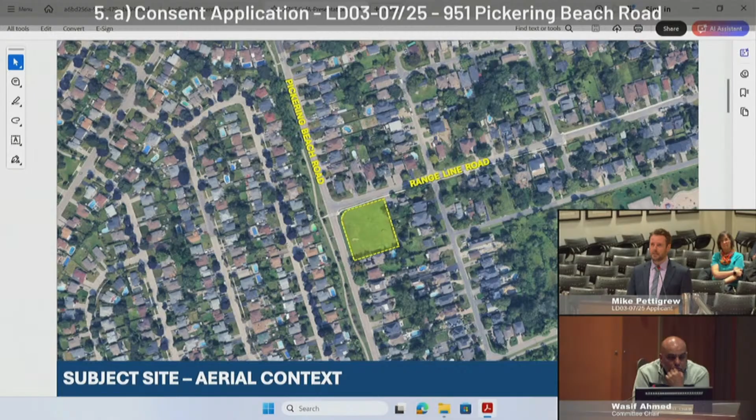So the previous approvals in 2021, those are the application numbers that were for the consents, and as I mentioned, those 5 lots are registered and they are in place. In 2022, we also submitted for minor variances for single detached homes on those properties, and those are the variances that were ultimately approved after an appeal to the OLT. The appeal was dismissed, and the ruling of the Committee of Adjustment was therefore upheld.

So the current permissions: on April 7th and then subsequently on April 22nd, the Planning Committee and Council heard and then approved a rezoning of the property to the R2B zone to allow for the semi-detached units. We submitted concurrently the application for the consents that follow and conform to the provisions of the R2B zone. So we are not seeking any variances to that zone. It is the standard zone that is going to be in place, and the lots before you today will actually positively exceed some of those provisions.

For instance, the semi-detached in the R2B allows for a 6-meter frontage. We're actually doing 7.62, which maintains the 15.24 standard from the single detached. We've just simply split those in half.

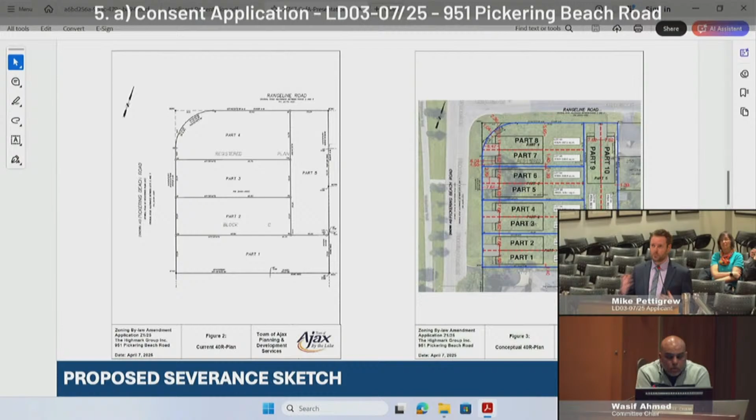On the right it also shows the footprints. You can see that there are still significant rear yards to these properties—they're quite deep—so we're maintaining the same general footprints as the singles.

Next slide, please. This might be a little harder to see, but I'm trying to show it in context—if you can zoom in, that's the same drawing you saw on the right, but now in context with the rest of the neighborhood. Again, this illustrates how those building footprints and the rear yards and setbacks around them are very similar to the single detached units and dwellings in the immediate surrounding.

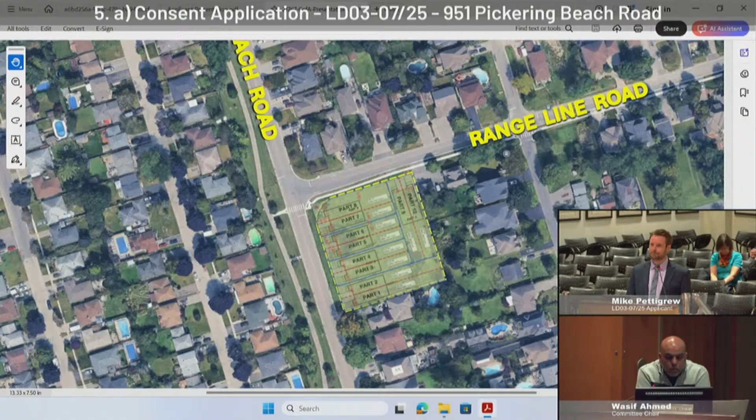Next slide, please. This is the same thing, but I've just put the building footprints there to illustrate: outside of those footprints, of course, are the driveways at the front, and you can see the amount of open space that'll be in the rear yards for each of those properties.

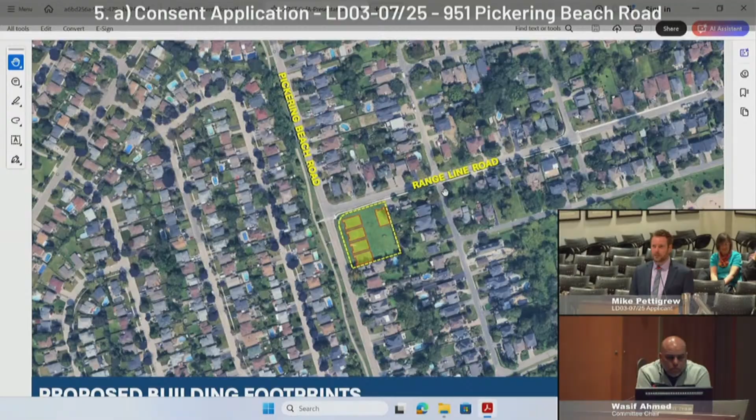Next slide, please. In terms of the policy context, which was also looked at through the zoning approval that went through Planning Committee and Council, the proposal—and we agree with staff's opinion—is consistent with the provincial planning statement. It does conform to the Region of Durham official plan as well as the Town of Ajax official plan, and as I mentioned at the beginning, it will conform with the R2B zone now in place based on Council's approval.

We are not seeking any additional variances. There will just be the variances that run with the property previously. In terms of the overall Planning Act criteria, these lots are consistent with what is in the area in terms of the 15-meter or 15.24 meter wide lots, but as 2 units rather than a single unit. It's maintaining the same driveway widths, not in excess, same amount of landscape and open space in terms of coverage, as well as the overall height and massing of the building, which in our opinion is consistent with the character of the neighborhood.

So therefore, in conclusion, we've reviewed the report, as we already mentioned at the beginning, and those conditions, and we are in support. Based on that, we recommend approval of the severance request subject to those conditions. Last slide is just any questions.

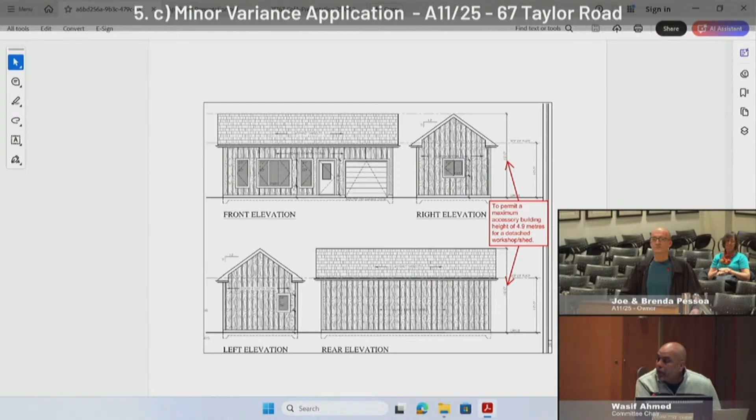All right, Joe, so that's been approved. It'll now be subject to the 20-day appeal period, like I mentioned at the beginning. But while you're doing that, you can still apply for any paperwork, building permits, that stuff. Just note that it will not be issued until the 20 days have lapsed.

Okay, that's fine. Yeah, thank you very much for the committee and the staff as well. Yeah, they're awesome. Smooth sailing. Thank you, Henry. Thanks. Thank you. Good luck.

All right, next on the agenda is item D, minor variance application A1225 for 701 Finley Avenue. This is to permit a minimum setback for the north interior side lot line of 1.8 meters and to permit a minimum one parking space per 224 square meters of gross floor area for a public storage facility.

Do we have an applicant or an agent here for this application? Yes, hi, good evening. Is that Heath? It is, yes. Good evening, sir. Can I just get you to introduce yourself a little bit and your relation to this application?

Sure. Good evening, Chair and committee members. My name's Heath Partell-Sharp. I'm a senior planner with Groundswell Urban Planners, and we're here on behalf of the owners of 701 Finley Avenue.

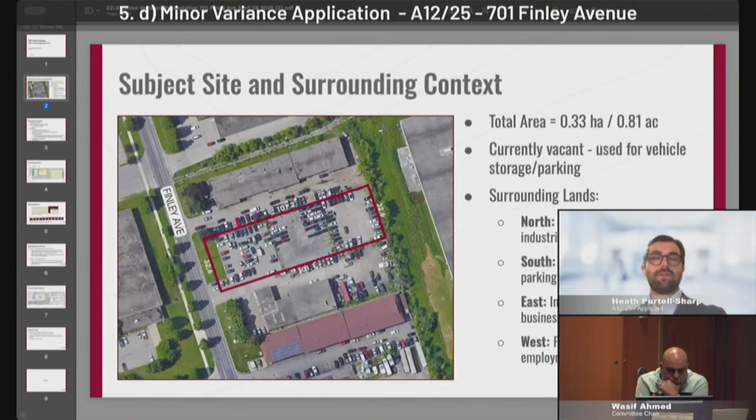The site is currently vacant of any buildings or structures, and it does have an existing curb cut access off of Finley Avenue on the left side of the screen there.

So the development proposal, we're currently working through a site plan application with the planning department, which proposes to develop the site for a small public storage facility. The development includes 3 storage buildings with a total of approximately 1,120 square meters of storage space.

Buildings B and C, on the east side of the site, are designed as individual units with roller doors more for drive-up access. The larger Building A on the west side is designed as smaller units with a common building entrance. We're proposing 5 parking spaces for this development, along with a large dedicated loading space as well.

In support of our site plan application, we submitted a traffic impact and parking study undertaken by our consultant, JD Engineering. It assessed storage facility parking precedents in the surrounding area in both Ajax and Pickering, conducted and obtained proxy data from those sites, and ultimately concluded that the proposed 5 parking spaces would satisfy the peak parking demand for this development.

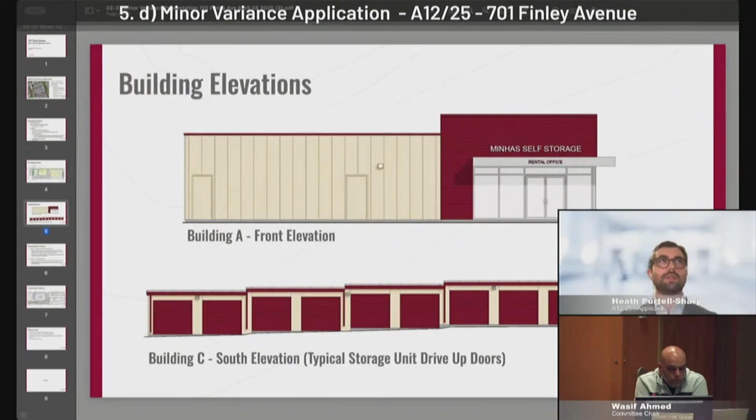The variances we're requesting are, specifically, from Section 5.10.2, which requires a parking rate of 1 space per 28 square meters of GFA for non-residential uses not specified a specific rate in the town zoning bylaw, as a public storage facility is not specified under this section. This is the standard required rate in the bylaw. So the variance we're seeking is to permit 1 space per 224 square meters for the public storage facility.

The second variance we're seeking is from Section 6.4.2, which requires a minimum setback of 3.5 meters from the interior side lot lines. Our variance seeks to permit a minimum setback of 1.8 meters from the interior side lot line, but this is limited to the north interior setback only.

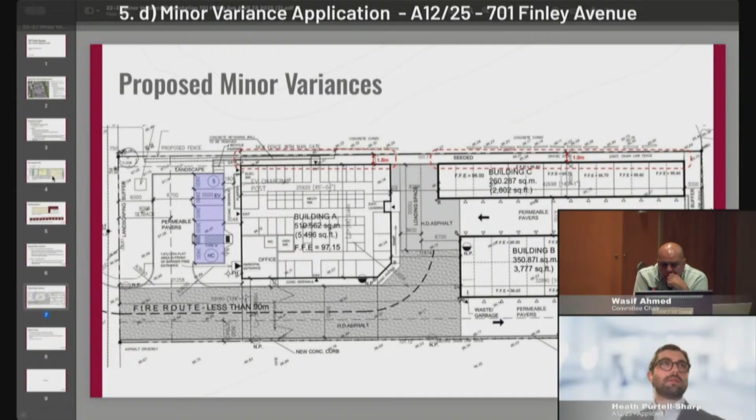Okay, so the 1.8 on the top right of that, highlighted in red - what's immediately to the south of that area? I see the units in the pictorial, but are those units the drive-up units, or will there be cars coming right up to that area, or is that from the inside only? Maybe on Building A specifically, can you better show it on this image with the color differences - is the concern on the east side of Building A or the west side, the left or the right? The top would be the north, correct? So it's those ones there - that's the one I'm questioning.

So I can see in the background of that yellow area, I can see the units - I believe those are storage units, correct? Are those the drive-up ones, or are the drive-up ones only in buildings B and C, and those ones there are actually inside a building, a covered building?

That is correct. Building A is a more traditional warehouse style building with walk-in access storage units, and buildings B and C are demarked with these small triangles where the vehicle drive-up roller doors are.

So the north interior side lot line relief you're seeking faces this property, and looking southwards I would just see a flat building, correct? Correct, yes. There's no windows or anything in that building structure that would be overlooking. Okay, thank you, I appreciate that.

All right, I'll then look to other committee members to see if they have any questions. Amanda?

Through the chair, will Building A be staffed? Will there be an employee in Building A? There may be an employee there from time to time to deal with rental arrangements, but I don't anticipate full-time staff on site. It's intended to operate as an unstaffed facility.

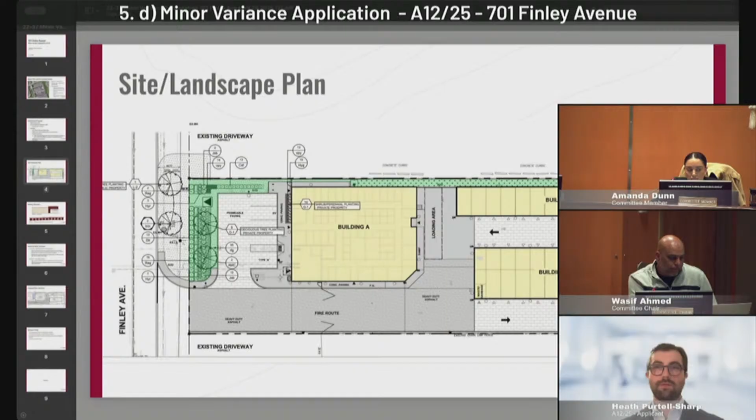Yes, I believe those two sites were actually quite significantly larger than this one, approximately 9,000 square meters of storage space. In both instances, I believe it was 6 parking spaces at one and 7 at the other, so that would be closer to 1 space per 1,400 or 1,500 square meters. Okay, thank you.

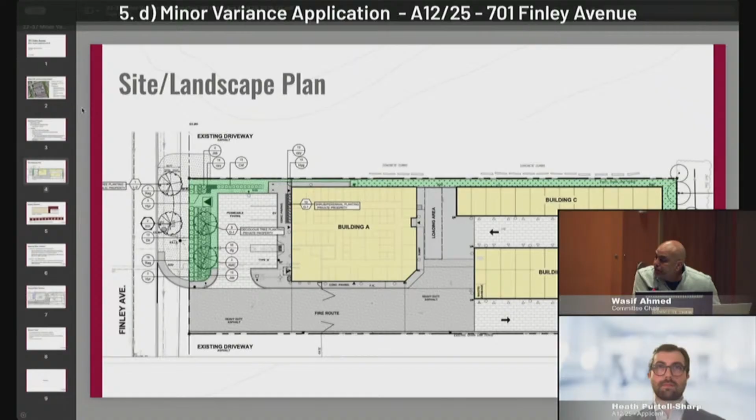Any other questions from members of the committee? No? Okay, then I'll look to see whether there's anybody online waiting to speak either for or against this application, staff? No? Okay, then I'll look in the audience here to see whether there's anybody physically present to speak either for or against this application. Again, we're on application A1225 for 701 Finley.

Okay, seeing none, then I'll look to see whether there's a motion from the committee members. Ken?

Through you, Mr. Chair, I would move approval of application A1225, subject to the condition set out in the staff report. The requested variance is minor in nature, desirable for the appropriate development and use of the property, and in keeping with the general intent and purpose of the official plan and zoning bylaw.

Okay, motion noted, thank you Ken. Can I get a seconder? Amanda? Right, any discussion on the motion? Seeing none, then I'll look for a vote.

Okay, so as you may be able to see on your screen, the vote has been carried unanimously, so the variance application has been approved. It will now be subject to the routine 20-day appeal period. You can file paperwork, building permits, etc., but they will not be issued until the 20 days have lapsed.

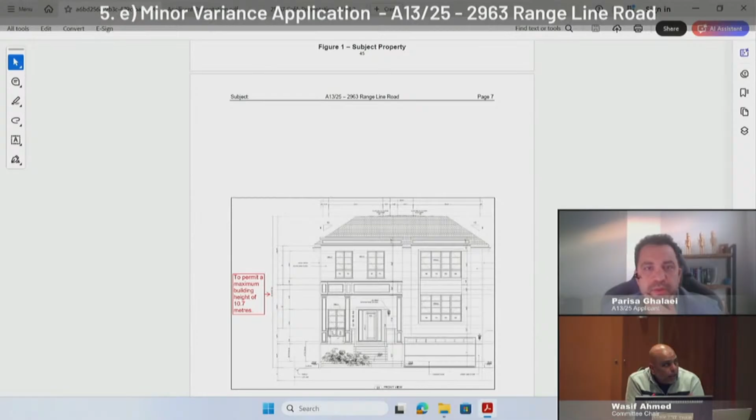Can I share my screen too? Yeah. I think you'll see some pictures we have here. You tell us whether you're comfortable with this.

Yeah, this is a 10.7 meter height.

Well, I've read through the report, as it sounds like you have as well. There is a report recommending approval that staff has put together for the committee members. It is also subject to a handful of conditions. I just want to make sure I read them out quickly for your benefit, the benefit of the minutes, and the audience here in the room. That the subject variance applies only to the property municipally known as 2963 Range Line Road, substantially in accordance with the drawings that were submitted with this application.

Number two, that the owner applicant obtain consent from abutting property owners for any impacts to existing trees located on abutting properties, and shall provide consent to the town prior to the issuance of any building permit. Number three, that the owner applicant preserve and protect any existing trees located within the town boulevard, specifically the Range Line Road right-of-way, or compensate accordingly through replacement tree planting or cash in lieu of tree compensation if preservation is not possible. The owner applicant shall address this matter to the satisfaction of the town prior to the issuance of any building permit, or the decision shall become null and void.

Number four, that the owner applicant maintain the existing drainage on the property, or this decision shall become null and void. And lastly, that the owner applicant obtain all necessary building permits from the town for this project. Are you in alignment with those conditions?

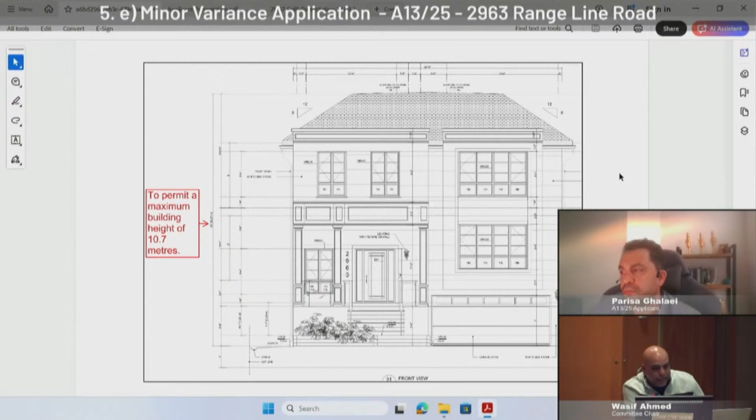Okay, would it be too much if I just added a little more specificity to condition number two, Tomas, since it's your motion, that the owner applicant obtain consent from the abutting property owners? If we can just list which properties those are. So I think it's like 2965 and 2960.

Sorry, I'll get there in a second. 2961. Mr. Chair, it's just 2 Cherry Road that was the specific neighbor at hand. It's in the staff report. So just the 2 Cherry? Yeah, the condition's a little more general, but if you read through the staff report under the design services comments, you'll see the specific property at hand that we were talking about.

So then based on that, are you in alignment if we just add that very specifically? Yeah, no issues with that. So Tomas, are you okay if we just add that to say the 2 Cherry Road neighbor? All right, so the motion's been amended. Can I get a seconder on the amended motion? Ken? All right, any discussion on the motion? Okay, then I'll look for a vote.

So, sir, your motion has been carried as amended. And it'll now be subject to the 20-day appeal period that I'm sure you're familiar with. Again, building permits can be applied for during this time. You can initiate the paperwork, but nothing will be issued until the 20 days have lapsed.

Gerald, tell us a little bit about the project. The project is to build a single-family home. The issue in that neighborhood is the existing grade is really low, and the standard for measuring grade in Ajax is from the apex of the middle of the road, which is different from what we're used to for the neighboring grade to measure from. Because the road is almost at the same plane as the land, we have to raise the land. Unfortunately, anywhere else in the jurisdiction, it wouldn't matter—we would still comply with current height regulations. In this case, we spoke with the planners and the town, and they agreed it makes sense to raise our grade and apply for the variance to accommodate the structure accordingly. Essentially, for all intents and purposes, it meets the intent of the original planning for the area, and the relief we're applying for would help get that done.

Okay, no, fair enough. I'll look to see whether any committee members have any questions. Amanda?

Through the chair, could you confirm the driveway proposed is a two-car driveway, and whether the garage is a single-car or double-car garage? Let me pull up the drawing here so I can see it better. It does appear the driveway is two-car, looks to be 6 meters. I don't know if staff can confirm if the applicant is not able to. Through the chair, yes, it would be a double car garage. Oh, it's a double-car garage, okay. I just want to confirm because the staff report shows an accessory apartment is also proposed for this dwelling, so parking complies for that, it appears. Correct, the parking complies. Okay, thank you.

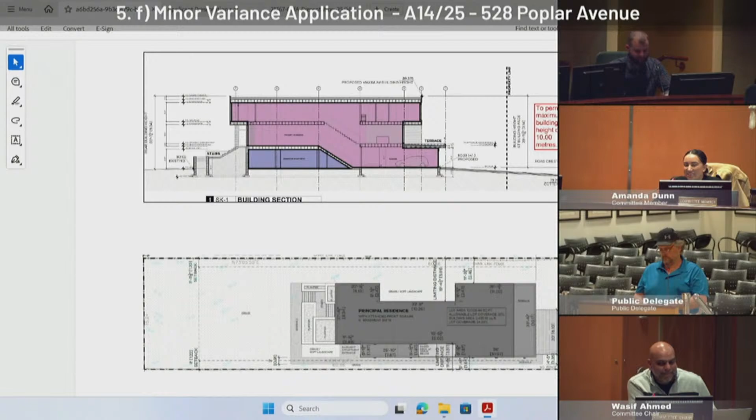Okay, anything else, Amanda? No? Okay, any other questions from committee members? No? Okay, thank you. Is there anybody else here or online to speak for or against the application? No? Okay, is there anybody here in the room wanting to speak for or against this application? Again, that's for 528 Poplar.

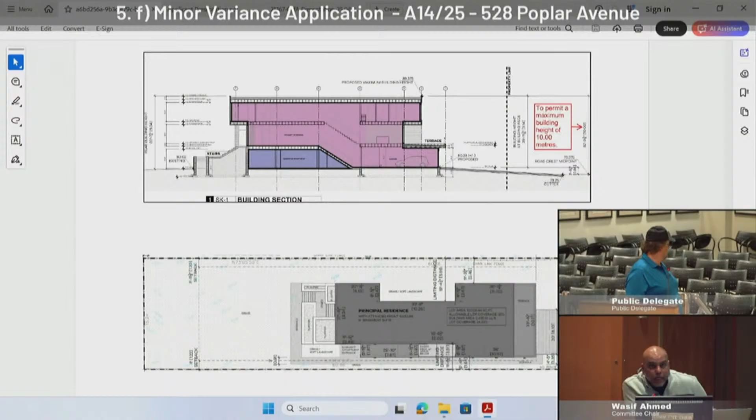Sorry, were you coming up to speak either for or against this application? Absolutely, yes. Okay, so sorry, if I can just have you take a seat, and if you can come up to the podium and introduce yourself, and we'll take it from there.

Good evening. Red is on? Yeah, just maybe pull it down a touch. Oh, sure. There we go. Rachel, we actually live right next door at 530 Poplar Ave. This is a little bit new to us, so we're new to the neighborhood as well, we've been here for 2 years. Obviously being close to the water is fantastic, and having a really great view is fantastic right now because we can actually look out the right side of our house and there's not an obstruction there right now.

Obviously we knew that would be short-lived, but some of the questions we'd have pertaining to the lot would be around the cherry tree that has really deep roots underneath probably halfway into our backyard, under our actual pavement, part of our parking where we park our vehicles. So what would the consideration be, considering there are very deep roots adjacent to that property?

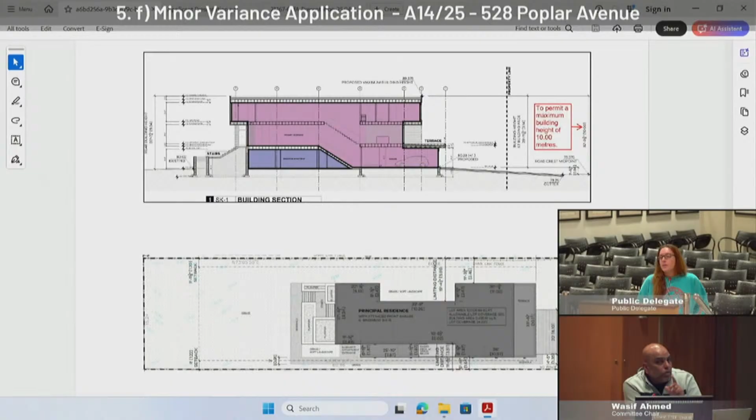So just to confirm, the tree you're inquiring about is on the subject property, not your property. Correct. And you're wondering if it were removed, what would happen with the roots? Yes, well, I assume they would keep them. Usually they don't go to the extent of removing the entirety of the roots underground, it's too difficult, so they usually just bring it down to the level on that property at grade. So they wouldn't be tearing up your asphalt driveway if that's what you're asking.

So part of that's already growing under the fence line that's there. So I would love to understand what that would look like, because obviously, there's the property line itself, right, and then if there needs to be any sort of variance that comes over onto our property line, we just want to understand what that would look like.

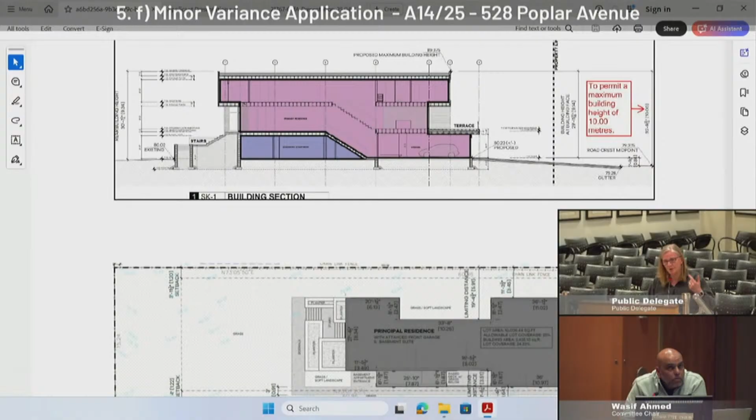And at the point permits start to be approved, is there another hearing process if there are objections to final drawings, or is this it? This is the only public process. Building permits are not a public process. So if there is information you wanted to know, you wanted to be kept in the loop, you can just come to town hall, you can reach out.

Okay, thank you. Okay, thank you.

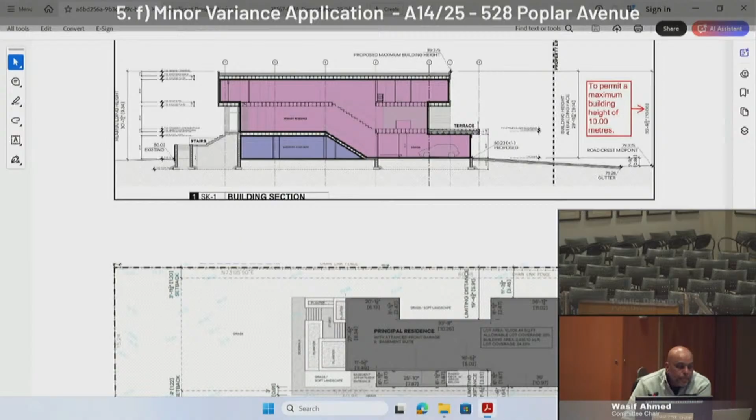All right, again, we're on application A1425, 528 Poplar Avenue. Is there anybody else here to speak either for or against this application? Okay, seeing none, I'll do one final check with committee members to see if they have any questions.

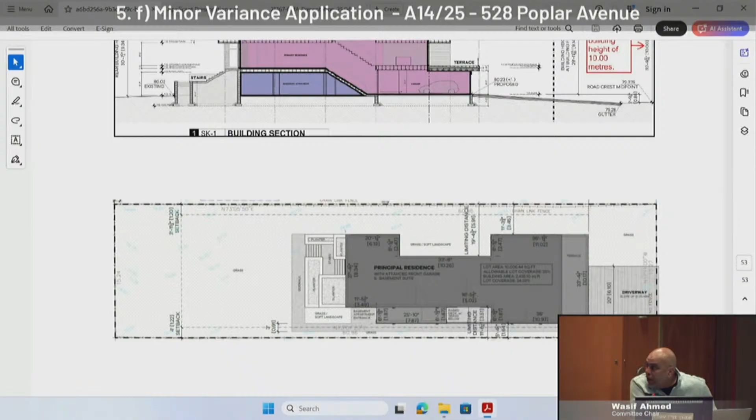Okay, if not, then I will look for a motion. Amanda? I move that minor variance application A1425 be approved, subject to the conditions contained in the staff report, as the proposal is considered minor in nature, desirable for the appropriate development and use of lands, and in keeping with the general intent and purpose of the official plan and zoning bylaw.

Okay, motion noted, seconded by Ken. Any discussion on the motion? Okay, seeing none, then I will look for a vote.

And the vote has been carried. So, sir, your application this evening has been approved, and it'll now be subject to the 20-day appeal period.

Is there anybody here to speak either for or against? No, there isn't. Okay, and nobody online either? Okay, perfect. So the committee has a staff report that was prepared by town staff that recommends approval for consent application LD 08/25, which is requesting a certificate of validation over the subject parcels of land.